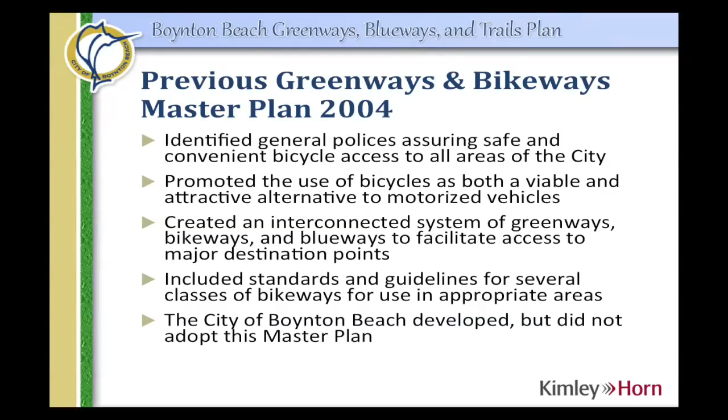We're building from a plan that Carice mentioned, which was the 2004 Trails Plan. It primarily looked at recreational trails. We're expanding upon that to include public streets as well, for things like on-road bike lanes and sidewalks, but this can serve as a base for the work we're doing.

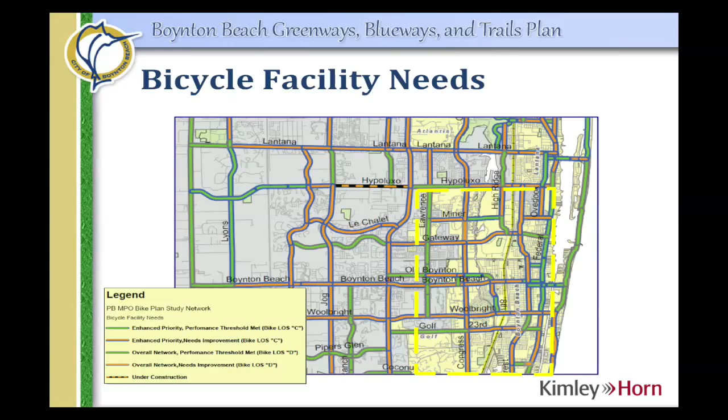I want to talk about building upon work going on at more of a county or regional level. Palm Beach County, through the Metropolitan Planning Organization, or MPO, has developed a bikeway plan that we've looked at and evaluated as input as part of this project. The Treasure Coast Regional Planning Council, or TCRPC, is also looking at a regional plan of hiking and bicycling trails that include projects right here within Boynton Beach.

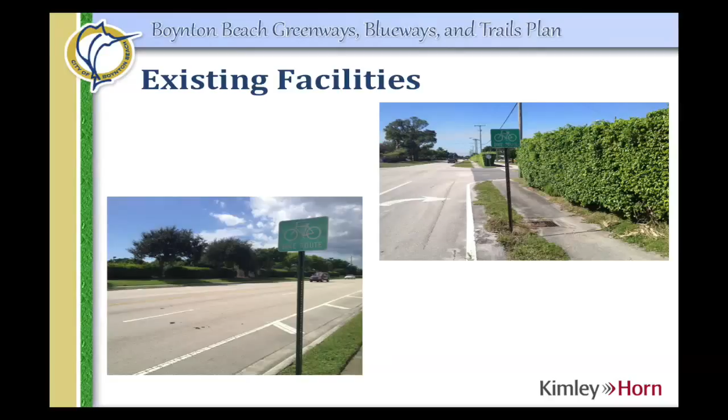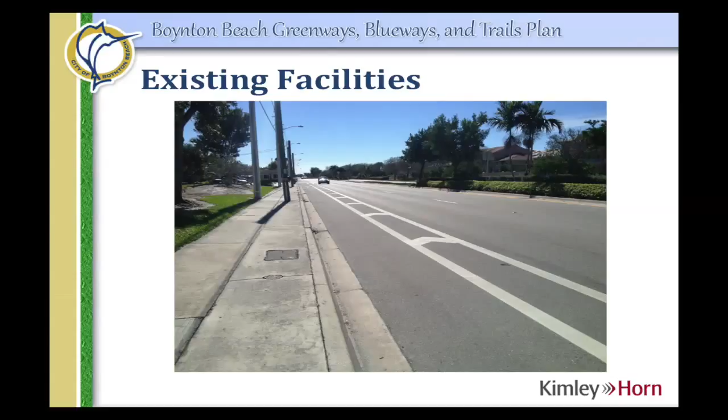Some of you may know that our US 1 section was one of the first sections within all of the local FDOT district to have what's called a buffered bike lane, where the bike lane has a little bit of additional separation from moving car traffic through this painted buffer. That was done a number of years ago, and buffered bike lanes are now the standard bike lane facility for the Florida Department of Transportation.

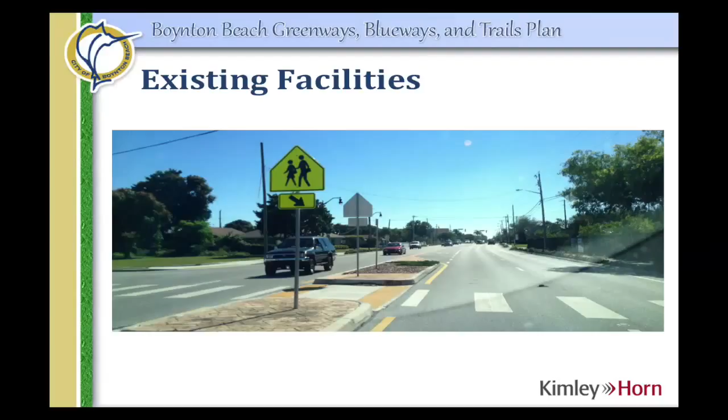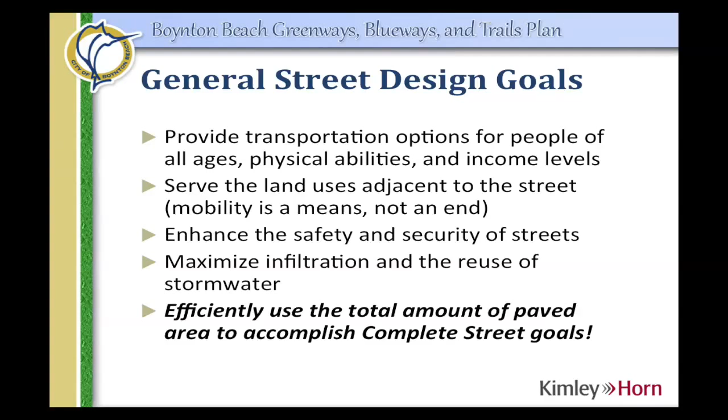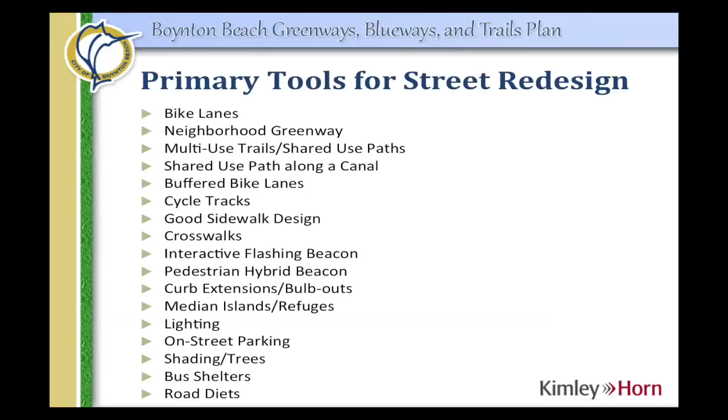This is a list of some of the primary tools that we have for street design to make them more safe for bicycling and walking. I'm not going to go through this whole list, but I do want to show some images of the primary ones, the facilities that we're most looking at for this particular project.

It's very similar to what you see here with the pedestrian and bicycle infrastructure elements board. So if you haven't yet voted for your favorites, you may want to pay attention to this section and get some potential ideas.

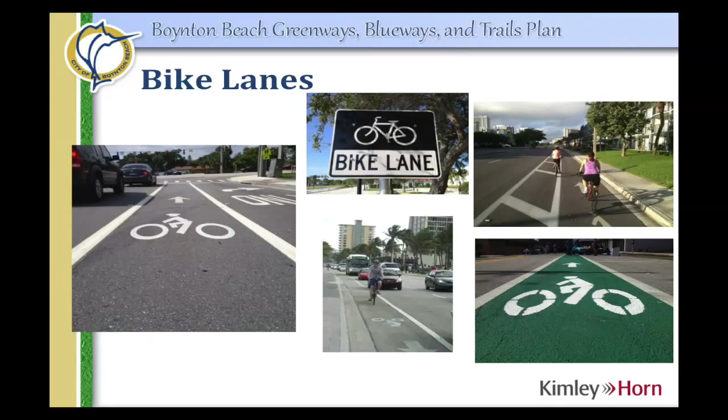The next type of facility is called Neighborhood Greenway. Neighborhood greenways are the pink lines that we have drawn on this preliminary route map. So those pink ones would look like this.

Essentially, those are streets that are meant to be low volume, low speed type of streets already, where we wouldn't necessarily need to build a separate path or a separate sidewalk because most cyclists feel comfortable riding in the road already. These tend to be more like your neighborhood streets, especially those streets that might have a nice tree canopy that are shaded, where people can ride their bikes along the street.

And they can be designated through signage or pavement markings rather than having to tear up some of the grass and build additional asphalt or sidewalks, because we do want to try to make sure that we're maximizing green space as part of this project as well.

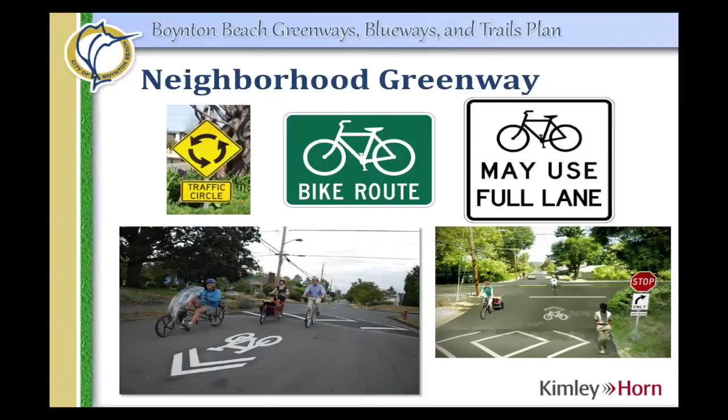So that's what a neighborhood greenway would be. A multi-use trail or shared use path just means that it's shared between pedestrians and bicyclists. So walking and bicycling would occur on the same pathway, and these tend to be in areas along roadways or along a canal such as this.

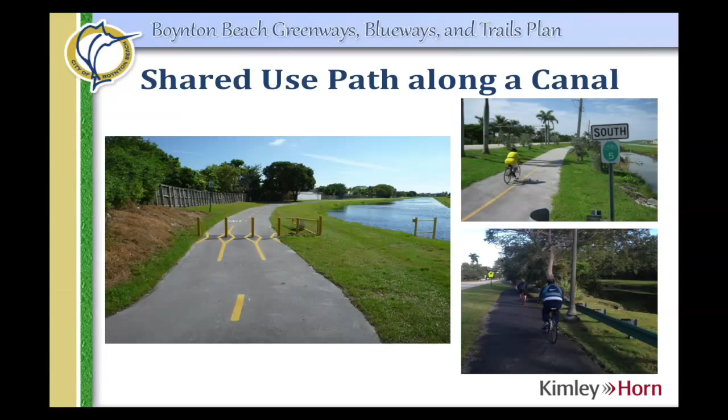In the canal one, you probably will find a sparser usage or maybe more bicycling usage for longer distance trips. But either way, they're sort of the off-road alternative to the bike lanes and neighborhood greenways. This is an example of a shared use path along a South Florida Water Management District canal recently implemented in Miami-Dade County. One of those we've looked at is along the Stanley Weaver Canal as well, which is this blue line right here across the middle of the map.

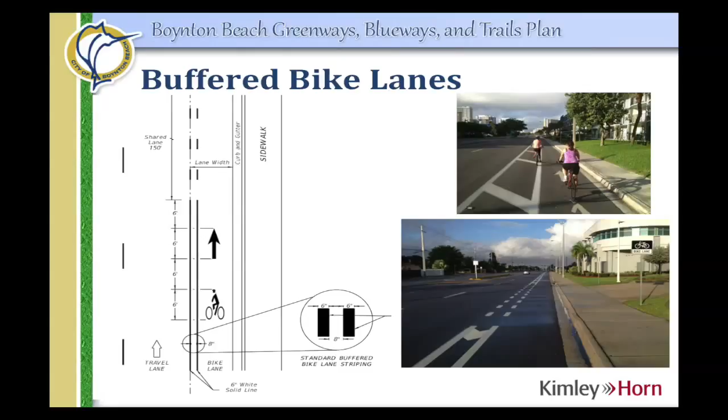I mentioned buffered bike lanes. FDOT has a new design standard for providing that buffer, and so all new bike lanes built on state highways would have this type of facility. US 1 is an example. Boynton Beach Boulevard is another example of a state roadway through our city.

Then a higher level on-road facility is called the cycle track. This is where the bike lane is not just separated with paint, but separated with some type of physical barrier. It could be curbing or even on-street parking, and the bicycles ride next to the curb between the parked cars and the sidewalks. This is typically applied in a downtown core type of setting.

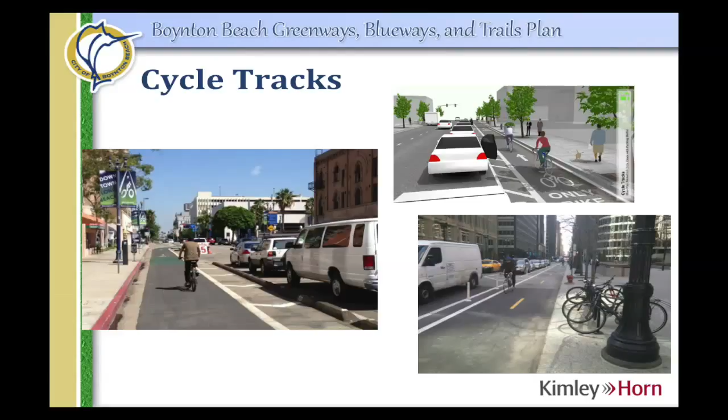Sidewalk design is very important - not just laying out the sidewalk as leftover space on the side of the road, but there are actually good design and planning principles for how to provide it. These include providing trees next to the roadway to help shield and separate pedestrians, but also to provide shade. These two images give an example of streets built to good sidewalk design principles, and we would want future sidewalks to have this type of amenity, especially in a downtown type of setting.

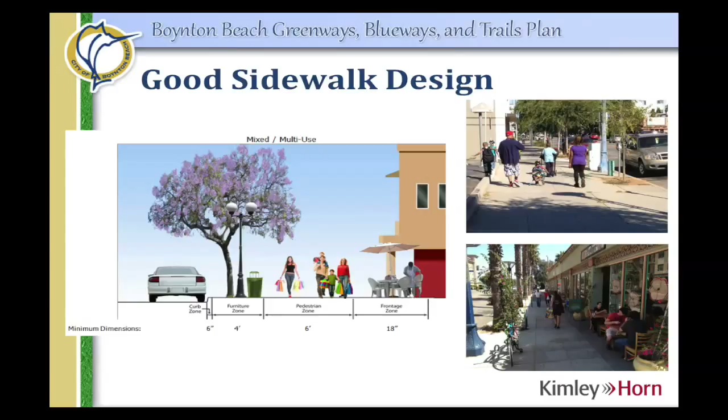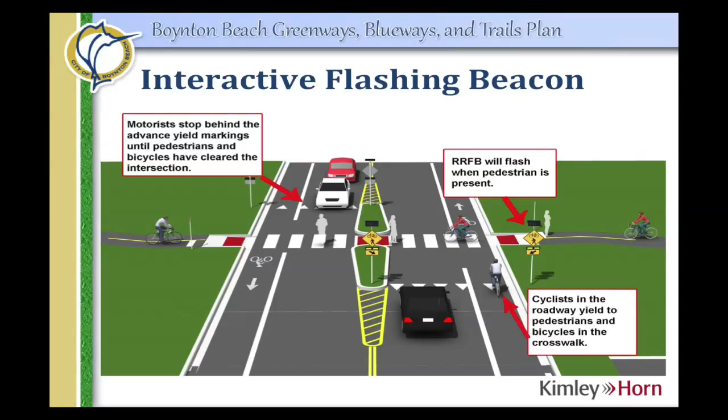Interactive flashing beacons can be added to crosswalks to help users cross the street. They can essentially press a button to create a flashing light to warn motorists that they're getting ready to cross. We have an example of an interactive flashing beacon right here on our elements map, but it's just a way of enhancing the crossing experience.

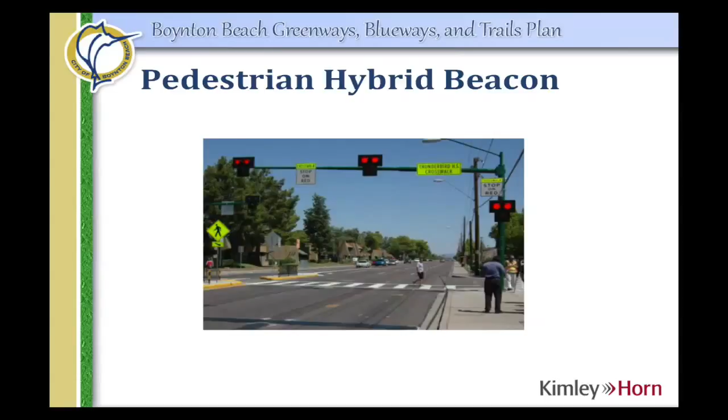This is another example of actually providing a traffic signal at some of the higher volume streets that would go red when a pedestrian presses the button, stopping the cars to allow the pedestrian to cross. There are also ways of designing crosswalks that signal the crossing activity to motorists, such as through textured pavement in these two examples.

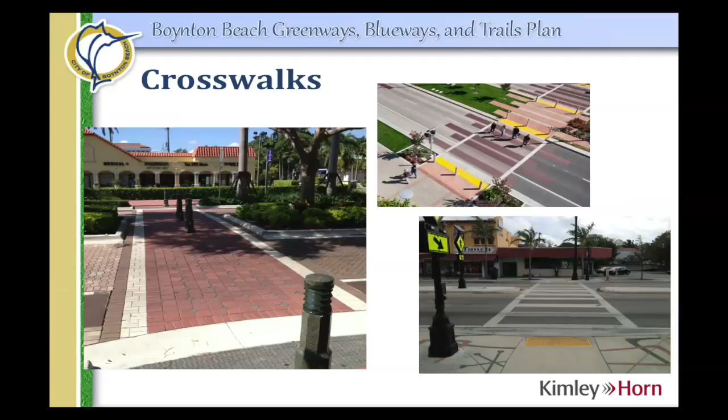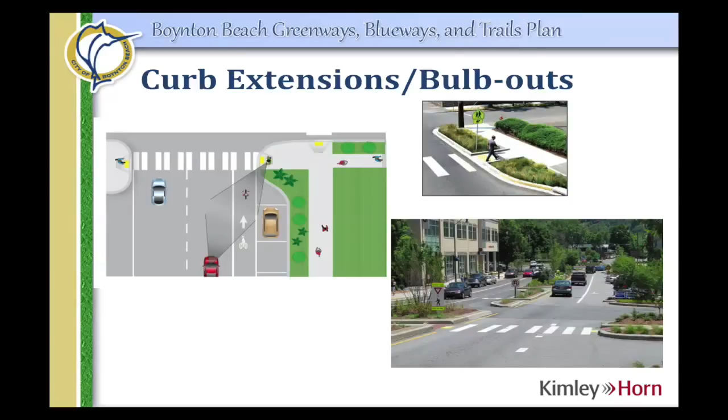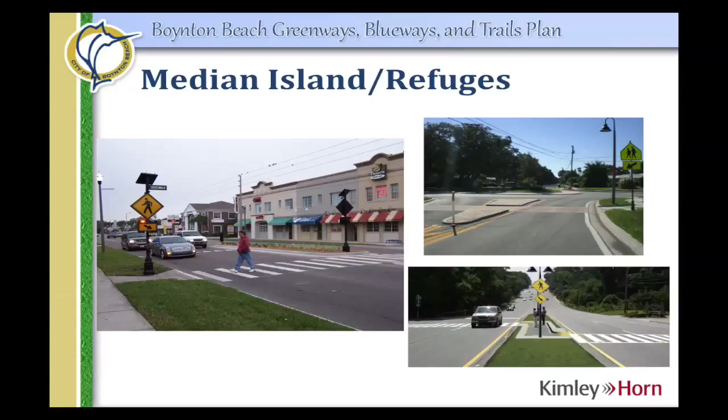Providing a median is very important because it gives people a refuge in the middle of the road to help them cross the street. Extending the curbs through things like curb extensions shortens the distance pedestrians have to cross, and also increases their visibility, which is very important for safety. It gets them out closer to where they're going to be crossing traffic, increasing visibility with motorists. Median islands are important not just for crosswalks, but potentially at intersections or roundabouts as well, providing that pedestrian refuge.

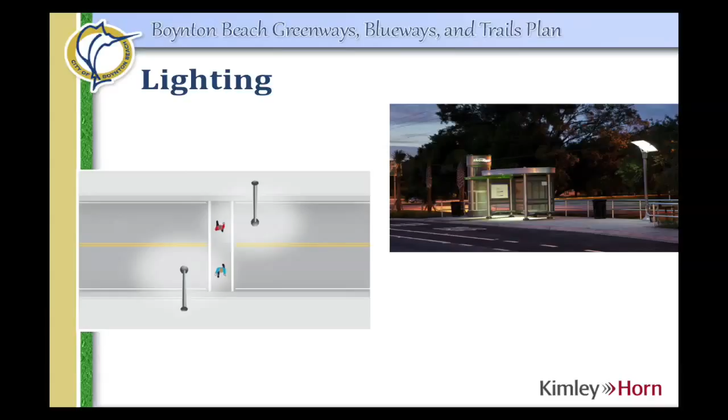Lighting is something that could be included on some of these projects. It's probably not going to be included on all of them because lighting can be quite costly, but in important places like crosswalks and bus shelters, it would be important to include as a design element. On-street parking for urbanized areas helps promote a walkable environment - if you have good on-street parking, it gives people a place they can get out of their car and walk around within a downtown type setting.

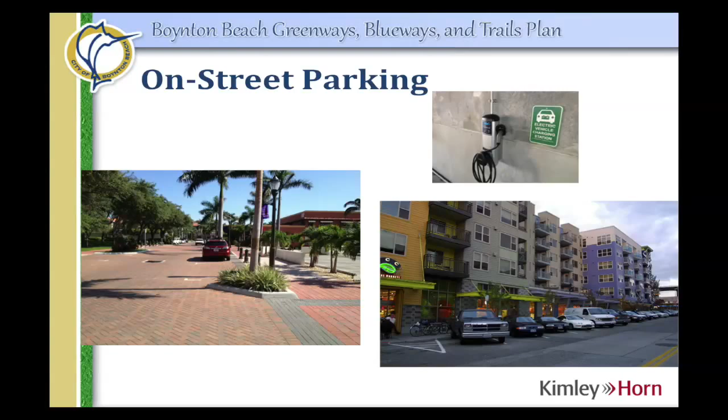Shading and trees could potentially be a component of some of these projects in order to help improve walkability. Bus shelters could potentially be included at some of the higher volume stops, providing a space that people could get out of the weather, more than just having a sign with a pole on the side of the road.

Another example of an implementation strategy is called a road diet. In a road diet, you could potentially start out with, say, a 4-lane road and reduce the number of lanes for cars maybe to 3, in order to reallocate space for other types of amenities. In the example shown here, that space has been reallocated to provide bike lanes in each direction. This diagram is a proposal for a street that used to be 4 lanes, essentially 2 lanes in each direction.

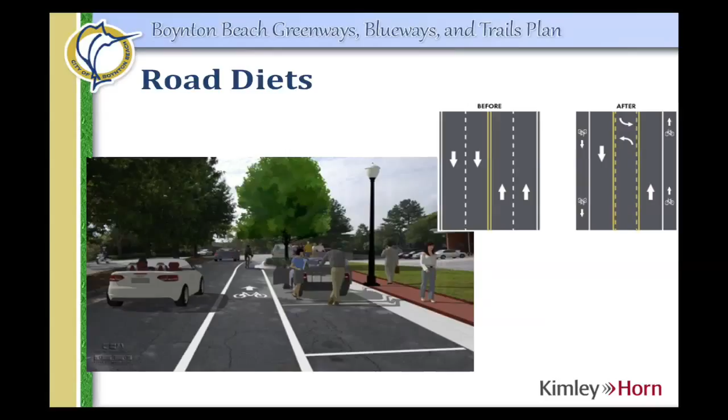There was a lane for cars here and a lane for cars here. The proposal was to remove one of the lanes and provide on-street parking, which creates a more walkable environment, and a bike lane. So a road diet is a potential implementation strategy that could be used to develop some of these projects.

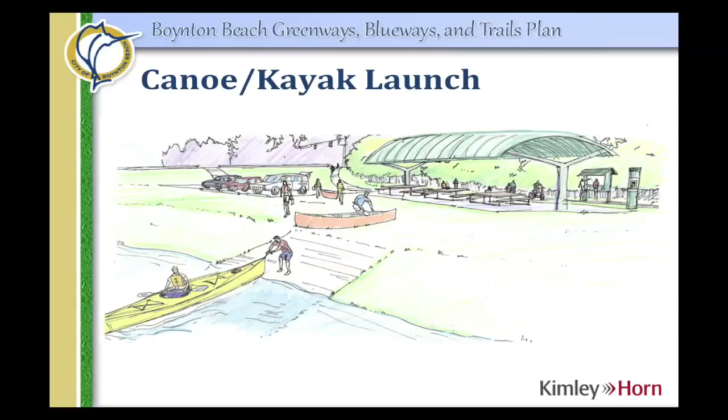We're also including Blueways in this project and incorporating our paddling trails, because there's a lot of synergy. We're connecting to parks with our bike trails, and we want to provide canoe and kayak launches at those parks for paddling. So we're incorporating the idea of Blueways into the project.

At some very special locations, like the larger parks, maybe like Caloosa, having a Trailhead, which is a gathering space, could include shelters and signage that gives people a map of what the bicycle trail network looks like, so they can see where they can go on the network. So a trailhead is a location where you would have that type of gathering space.

You ideally would like to locate these in places where you already may have facilities available, such as restrooms and water fountains, so that people can have that space to take a break from their walking and bicycling as well. So areas like the larger parks and areas near downtown, you would want to provide that.

Lastly, when it comes to the potential for the FEC Railroad, or Florida East Coast Railway, there is a regional project that is kind of a conceptual idea right now. But as the railroad becomes more used for passenger trains, especially in the future if the Tri-Rail Coastal Link project comes through, there would be more of a commuter rail type service on the FEC. And so there would be the need to have pedestrians and bicyclists be able to access the stations.

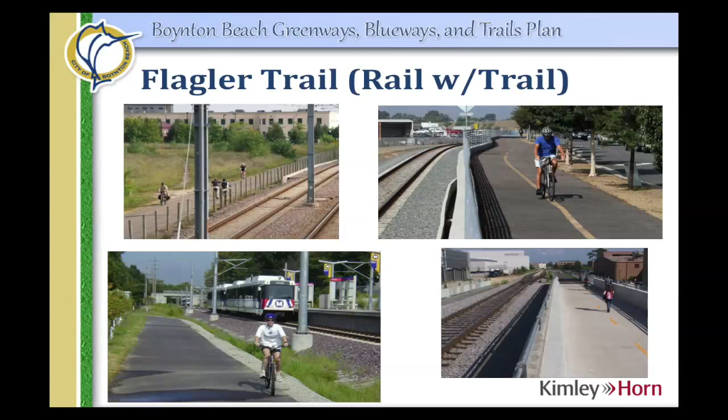One of the ideas that has been talked about is the potential for a station right here in downtown Boynton. So the regional agencies have identified a potential of having what's called a rail with trail. This is from the Treasure Coast Regional Planning Council's project. It could provide a path along the railroad in addition to the passenger trains to help funnel users toward the stations, but also provide mobility for the areas along the corridor as well.

So we're incorporating that idea, bringing it forward into our project, and that's basically the shared use path that we show along the FEC Railroad. That's just incorporating that regional project into our map for Boynton Beach.

I just want to wrap up this section of the presentation by listing a couple of our design principles. These are the things that we want to portray with the project. Good street design starts with a human scale approach, which modifies the way things had been done in the past, which was looking more at car capacity and traffic capacity as the design principle.

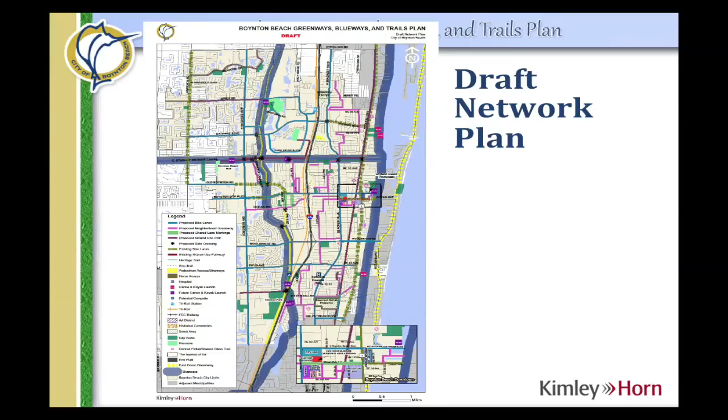I'm just going to finish with this graph right here, which is the exact same thing as the map you see here. It's the preliminary ideas that we have developed through our research and studying of the area. This is where I would like for you all to think about ideas that you have for the areas of the city that you think are important for walking and biking.